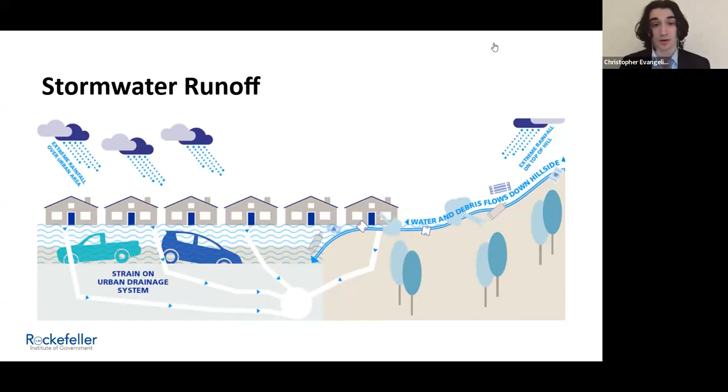To begin, let us fully understand how this flooding occurs. As everyone knows, clouds cause precipitation that leads to water being built up in the streets of our cities and suburban areas. This rain is built up in the pipes, and there is not enough drainage to properly assess and stop rain from compiling into massive floods, which was shown before. This is what we have now, traditional gray infrastructure, which is manufactured systems of drainage to stop stormwater and filtrate rainwater from piling up in the streets of cities and counties. This is our attempt to replace natural processes that remove rain and precipitation from our built environment, which is the areas that we live in, such as cities and suburban towns.

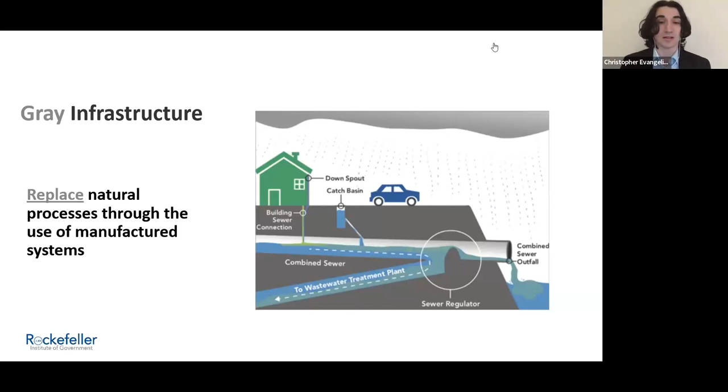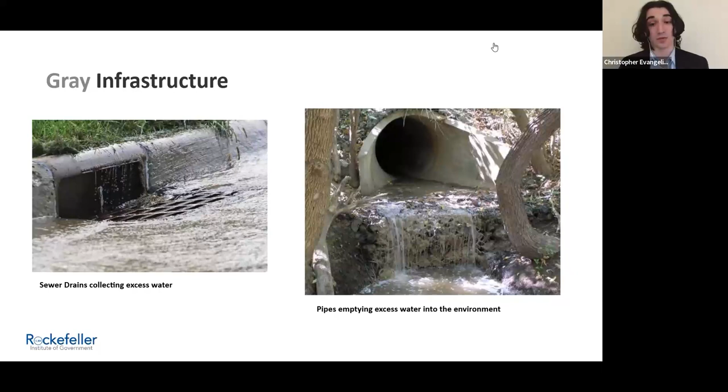These are just 2 examples of gray infrastructure showing sewer drains and piping. While these projects are doing the task of removing rainwater, they're also damaging the environment as shown by the right image, and also requiring immense construction times as well. All these systems combine to create the combined sewer overflow, or CSOs, which collect rainwater runoff, sewage, and wastewater into one pipe that is hastily removed. Which leads us to what we will be talking about today, green infrastructure. Green infrastructure is an approach to water management that protects, restores, and mimics natural processes in the water cycle. What this means in terms of stormwater mitigation is that water flows above ground, leading to extensive flooding and the spread of harmful pollutants into our waterways, such as rivers, lakes, and other bodies of water.

These waterways must be protected, and to do so, we need to improve on old infrastructure, gray infrastructure, by implementing these new measures to stop these areas from receiving regular flooding, also known as these flood zones.

This leads us to the implementation of green infrastructure itself, which is using nature in our cityscapes and urban environments in order to provide a filtration system for stormwater. This is the alternative to traditional gray infrastructure that we discussed before in terms of cost, aesthetic, and efficiency. This is the future of filtration, and this is what we need to implement in order to combat such harsh flooding. These are two projects that demonstrate the effectiveness and advantages of green infrastructure.

The left project is a permeable pavement, which uses a more porous concrete to allow water to seep to the bottom of the pavement, which decreases water buildup by about 70% as opposed to regular concrete, which is only about 10%.

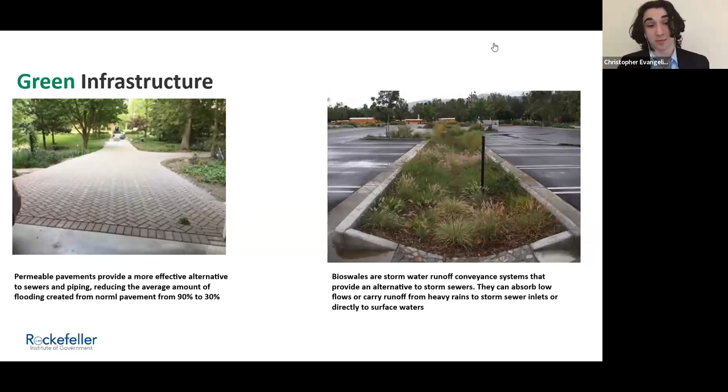With all that out of the way, my fellow cohort Amanda will now talk about the history of policy and federal involvement with green infrastructure in the United States.

Thank you, Chris. Hi, everyone. Thank you for joining us on this rainy day in New York. Maybe when you head outside afterwards, you'll notice some of the things that we're mentioning in this presentation.

And in the next few slides, we're going to review some of the history of the laws, as Chris mentioned, that have been implemented by the federal government to address stormwater runoff and water pollutants that can occur because of water overflow. The Federal Water Pollution Control Act of 1948 is the first law that focused and raised awareness of water pollution. The implementation of this law and its efforts are groundbreaking because it addressed the importance of protecting the waterways from hazardous contamination. It brought attention to the issues that were preventing some populations from accessing clean water.

The law directed states to implement water quality standards to ensure water safety. This means that each state was expected to monitor the water for pollutants. Standards must be set to meet specific requirements and criteria to ensure continuous water safety for consumption and usage. Unfortunately, the law was a lackluster success and was later amended to become part of the Clean Water Act in 1972. Next slide, please.

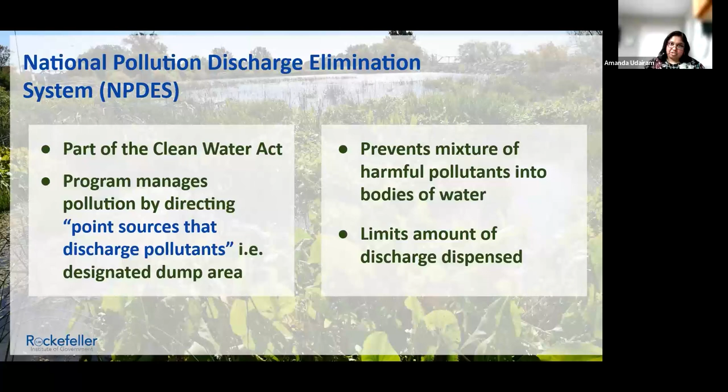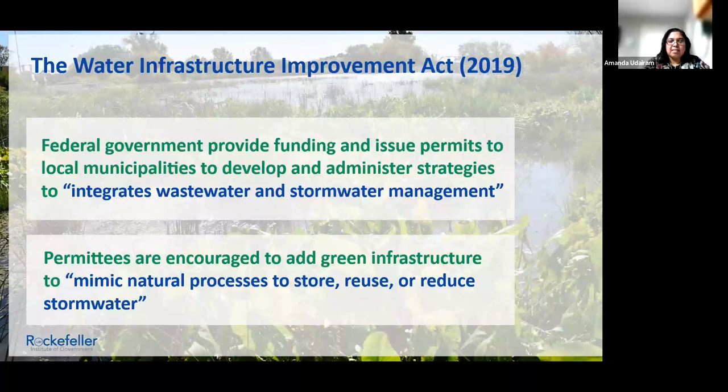More recently, the bipartisan infrastructure law was enacted, and it originated from the Infrastructure Investment and Jobs Act, which was passed in 2021. This law is monumental in that it provided the largest investment in water infrastructure. More than $50 billion were designated to the EPA infrastructure programs, which is to be distributed for improvements. Of this money, more than $12 billion were delegated for clean water infrastructure and $1.8 billion to protecting regional waters.

Additionally, $135 million were issued to improve the water. With this money, the EPA will oversee that the old water infrastructure be updated and maintained. Necessary safety improvements to waterways will also be made to encourage and promote recreational activities, such as swimming and fishing. Next slide, please.

In the next block, my cohorts will present their findings of 2 case studies. As mentioned, the first case study focuses on Toledo, Ohio, which borders the Maumee River, and the next case study centers around Albany, New York, and the Hudson River. An evaluation of best practices used in these cities to address and incorporate green infrastructure, reduce stormwater runoff, overflow, and flooding will be provided. Recommendations on how to move forward will also be discussed. Thank you. Here is Ashley, who will discuss the case study conducted in Toledo, Ohio.

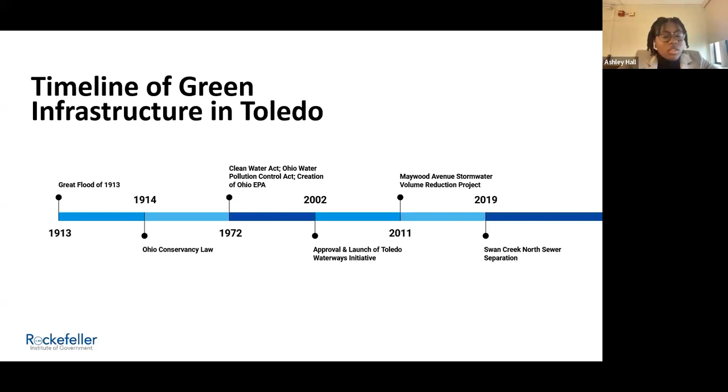In 1913, Ohio was hit with one of the greatest floods it has ever seen in its entire history. There were many days of heavy rainfall that caused a rise in water levels across the state. Following this major storm, the 1914 Ohio Conservancy Law was passed, which was the first law of its kind. It allowed the creation of regional agencies to provide flood protection for communities within the state. This was the start of Toledo's journey down the road of green infrastructure. Next, we see the Clean Water Act passed, as well as the creation of state EPAs, and following was the Toledo Waterways Initiative and two finished projects within Toledo. Next slide.

The Ohio Environmental Protection Agency's Division of Surface Water administers permits under the National Pollutant Discharge Elimination System, or NPDES. As for Toledo's major local policy, there is the Toledo Waterways Initiative. It is a $527 million program that will prevent 80% of the average overflow volume from getting into our waterways and is part of the city's long-term control plan to reduce combined sewer overflows. Next slide.

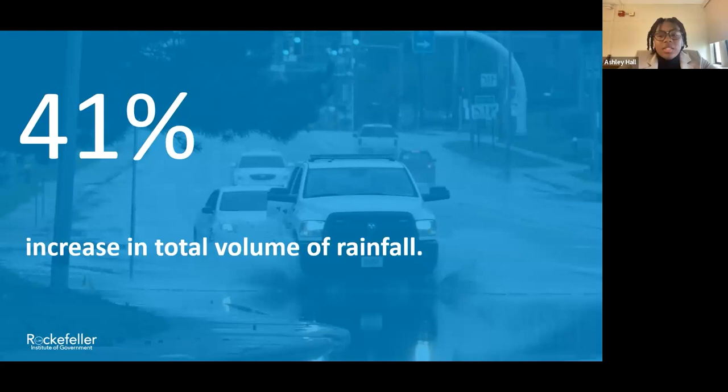An increase in Toledo's annual rainfall has caused systems like the Bayview wastewater treatment plant to reach capacity and consequently overflow. This overflow causes raw sewage to flow into Swan Creek, the Ottawa River, and the Maumee River. In 2021, it was reported to the Ohio EPA that as much as 150 million gallons of untreated wastewater were dumped in the Maumee. With the onslaught of changes in climate over the past 70 years, since the 1950s, the city has seen a 41% increase in the total volume of rainfall and a 19.4% increase in precipitation. With the threat of climate change, current flooding within the city will only continue to worsen. Next slide.

When asked about where she could see improvements in green infrastructure, Lauren Rush, a stormwater expert, said that the more you get people involved, the better it is for the community. Toledo has been very dedicated to engaging and educating the community in regards to green infrastructure and storm and wastewater mitigation. This has made it so that projects are easier because the community is involved and understands the importance of implementing green infrastructure. Next slide, please.

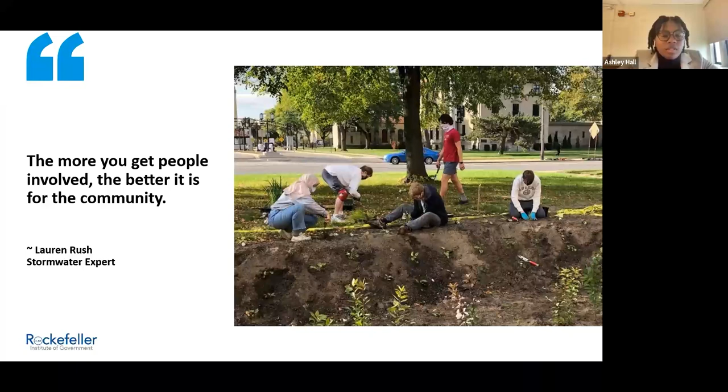The Maywood Avenue Stormwater Volume Reduction Project was a reconstruction of the neighborhood to accommodate bioswales, rain gardens, and a mix of other common green infrastructure practices. To reiterate what Chris said earlier, bioswales are an aesthetically pleasing alternative to storm sewers that use plants and soil mixtures to filter and treat stormwater.

The city chose this project because in Toledo, sewage and stormwater are carried in the same pipes, and the large quantities of stormwater tend to overwork the system, leading to flooding in resident basements. The implementation of bioswales and rain gardens is a great way to mitigate the flood risk in flood-prone areas. The result of this project was a 64% reduction in the average stormwater runoff on Maywood Avenue. Next slide, please.

The Swan Creek Sewer Separation Project was a large-scale project separating combined sewers within the Erie, Hamilton, Ewing, and Junction areas. The green infrastructure techniques used were biorecreation, bioretention, and bioswales as well. Bioretention areas are depressed areas that allow shallow ponding of stormwater runoff, and biorecreation is a bioretention field that can be used for recreation in drier conditions.

This project was a necessity for the city of Toledo to reduce combined sewage overflows that impacted Swan Creek and the Maumee River. This project is one of many employed by the Toledo Waterways Initiative. Because the project was completed in 2019, a proper assessment of the benefits of this project has not been made yet. However, it is projected that the completion of the TWI would reduce the volume of combined sewer overflows by 77%, and by 2020, eliminate an estimated 650 million gallons of untreated wastewater from waterways. Next slide, please.

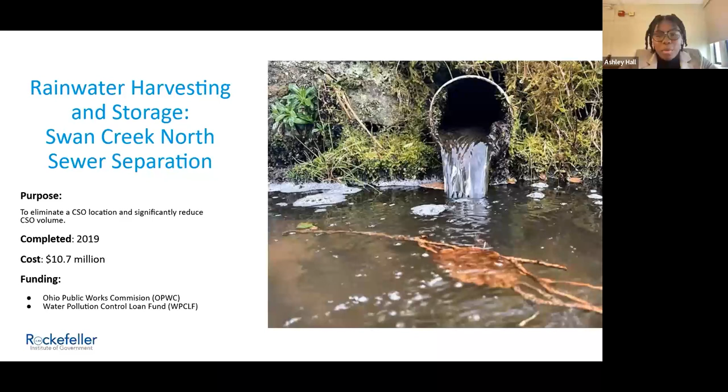Currently, the city of Toledo received $180.9 million in funding, and it's really interesting how they plan on using it. They are asking their citizens what they think should be done with the money, since they believe that a good portion of it could be used for replacing or repairing infrastructure. The money will be used as a part of the local Toledo Recovery Plan, which has a focus on youth, recreation, parks, green and healthy housing, job creation, economic development, and safe and livable neighborhoods.

Looking at this list, it seems as though there is space for green infrastructure projects or programs. However, because this is up to the citizens, it's a gripping moment since there's no clue as to how they think the money should be delegated. Next slide.

From Toledo, we can evaluate the impact of careful planning, proper identification of environmental issues, the essential component of engaging and educating the community, and the pros and cons of implementing smaller and larger projects on the environmental health of the city. From early on, Toledo was able to identify the issues they have and make a cost-benefit analysis of different green infrastructure programs they can use to solve their issues. Overall, it's safe to say the success of Toledo's projects is all due to these four factors. And now I will pass it on to our fellow cohort, Jessie, and she will be discussing Albany.

Thank you, Ashley. So we also picked the city of Albany to focus on as a smaller case study that can be compared to Toledo, Ohio. The city of Albany is of particular interest because it's not only the capital of New York State, but also has the Hudson River running through the capital region.

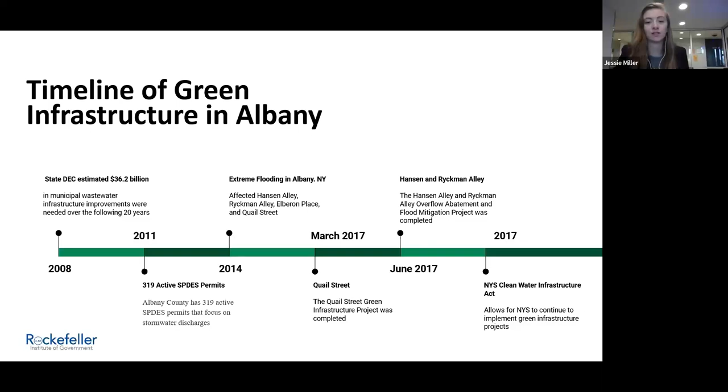And then we also have the enactment of the New York State Clean Water Infrastructure Act in 2017, which allows for New York State to continue to implement green infrastructure projects. Next slide, please.

So in 2008, the State Department of Environmental Conservation estimated that 36.2 billion in municipal wastewater infrastructure improvements were needed over the following 20 years, in part because New York State has some of the oldest water and wastewater systems in the United States. And as a result, many municipalities in the state must contend with aging infrastructure issues and the impacts of increased use and climate change. Next slide.

And the need for improvements in Albany especially became apparent when the city of Albany experienced an extreme flooding event in 2014. The streets and residential homes of Hansen Alley, Elberon Place, and Ryckman Alley were flooded by several feet of water and wastewater from combined sewer systems.

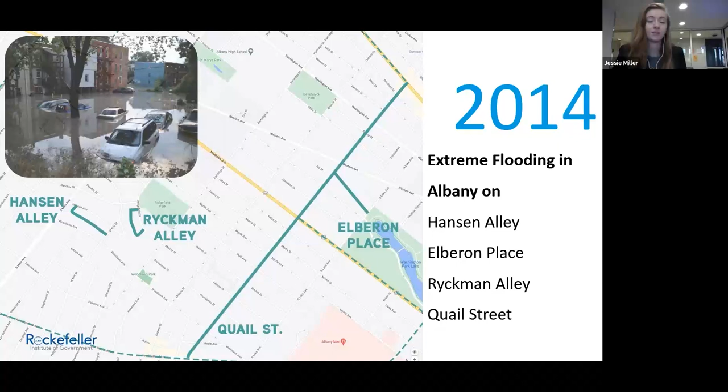The projects that have been put in place post-2014, including the Quail Street Green Infrastructure Project and the Hansen Alley and Ryckman Alley Overflow Abatement and Flood Mitigation Project, have acted within the scope of underlying New York State and federal policies, such as the State Pollutant Discharge Elimination System, also known as SPDES, and the Clean Water Act. Next slide.

The SPDES program has also been approved by the Environmental Protection Agency, specifically for the control of stormwater discharges in accordance with the Clean Water Act. The main difference between the two is that the SPDES program is broader in scope since it controls point source discharges to groundwaters as well as surface waters, in addition to providing funding as well. And the State Pollutant Discharge Elimination System program is designed to maintain New York's waters with reasonable standards of purity while eliminating pollution and maintaining the highest quality of water possible.

And the New York State Clean Water Infrastructure Act of 2017 invested $4 billion in water infrastructure projects and water quality protection across the state. As a part of this act, it offers $400 million in grants for clean and drinking water projects during the 2021-2022 state fiscal year to municipalities with projects that protect public health or improve water quality. Next slide, please.

In an interview with the New York regional contact from the EPA, Maureen Krudner, I had asked her if she could speak to what potential improvements could be made regarding policy and green infrastructure. And she said that from the policy end, looking at resiliency, New York State is actually trying to figure out how their regulations and these practices that are in their design manual, are they going to be good enough in 10 years? And she went on to explain that when it comes to green infrastructure, the mindset has become, how can we design this so it can be easily adapted in the future? Because the need that we have right now may not be the same need that we have 10 years from now. Next slide.

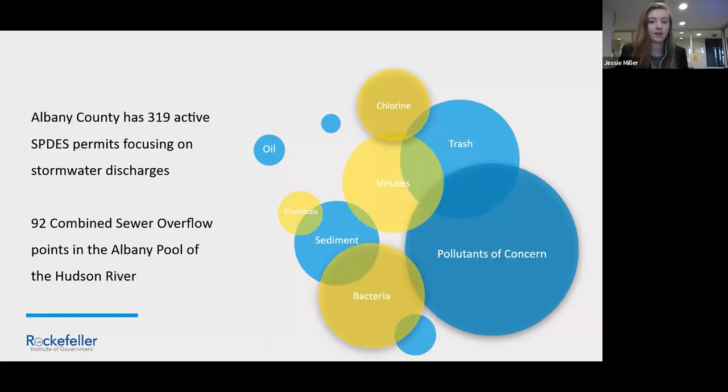So the first project that we looked at was the Quail Street Green Infrastructure Project. And for those of you that might not be familiar with the area, Quail Street is located in downtown Albany and typically houses many college students. The road also happens to be very narrow while simultaneously trying to accommodate for side street parking given the limited availability of off-street parking. The Quail Street Green Infrastructure Project runs along Quail Street from Madison Avenue to Central Avenue

and was implemented to reduce stormwater flows to the combined sewer system, which will decrease the frequency and intensity of combined sewer overflow occurrences. The project is able to do this by collecting the first 3 inches of rainfall in porous pavement and storm sewers and directing the runoff into bioretention basins until the flow in the combined sewer system returns to its normal level. And so the annual volume captured of this project is 8.867 million gallons, and the annual percent of combined sewer overflow reduction is 0.22% pool-wide.

And the funding for this project came from a Green Innovation Grant Program created by the New York State Environmental Facilities Corporation, which totaled 1.8 million, another 682,000 from the Albany Water Board, 293,000 from the city, and a $300,000 grant designated by the Office of State Assemblywoman Patricia Fahy. And this project acts in accordance with the state pollutant discharge elimination system permits.

And in an interview with Neil O'Connor, the engineer supervisor for the Albany Water Department, when talking about the impacts of the Quail Street Green Infrastructure Project, he had said that instead of extreme flooding happening once every 5 years, it's going to happen once every 50. And he went on to further say that we don't necessarily solve flooding.

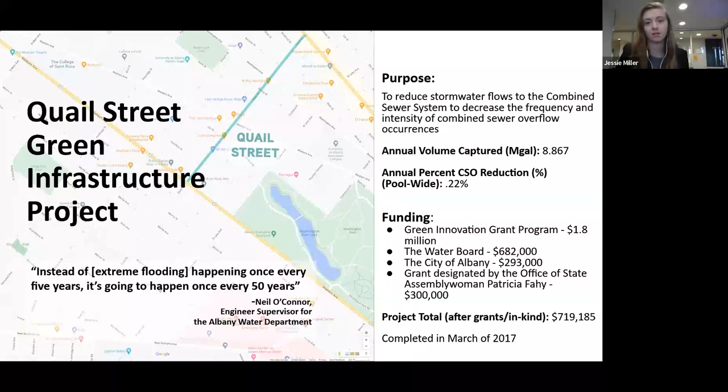And the next project that we looked at was the overflow and flood mitigation project of Hansen Alley and Ryckman Alley. Hansen Alley is a small alleyway that serves as an access drive for residents to reach their driveways. Hansen Alley is located in the residential area between Hanson Avenue and Woodlawn Avenue, which is a low-lying region where large amounts of stormwater runoff often collects.

So this project collects stormwater in new separate storm sewer pipes and is carried to an underground chamber system that is located beneath the Albany Central Babe Ruth baseball field. This allows for the reduction of flooding and runoff that would otherwise collect in combined sewers, leading to overflow. This project was completed in June of 2017 with future plans to design a pump station that uses collected rainwater for field irrigation.

And the City of Albany and the Albany Water Board produced results for 3 inches of rain in 1 hour. The total drainage area of this project was 13.7 acres, with 7.4 acres of this being impervious, which is equivalent to 54%. The maximum water surface for the design storm was 188 feet, and the maximum underground chamber volume was 776,500 gallons.

And in a performance analysis of the Hansen Alley project, it was found that after a total inflow of 120,000 cubic feet, there was 0 cubic feet of wet weather flow, meaning there was 100% reduction with 0 cubic feet of discharge in wet weather. Next slide, please.

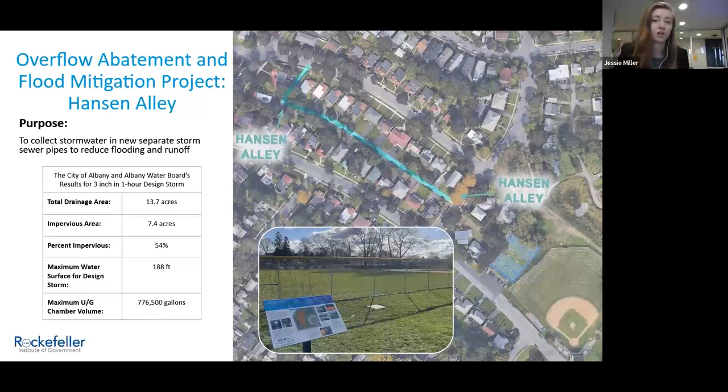The section of the project in Ryckman Alley was designed to have the same effects as that of Hansen Alley and serves as an access drive for the driveways of residents and is located in the residential area between Ridgefield Street and Ryckman Avenue, which is also a low-lying region. This project also separates the stormwater runoff into separate storm sewer pipes to reduce flooding and runoff in combined sewers, and was also completed in June of 2017.

And the City of Albany and the Albany Water Board also produced the results for 3 inches of rain in 1 hour for this project, with the total drainage area of 10.5 acres. 2.1 acres of this was impervious, which is equivalent to 20%. The maximum water surface for the design storm was 184.5 feet, and the maximum wetland volume was 640,300 gallons. In the performance analysis of the Ryckman Alley project, it was found that after experiencing 1.59 inches of precipitation, there was 0 cubic feet of wet weather flow and 0 cubic feet of discharge.

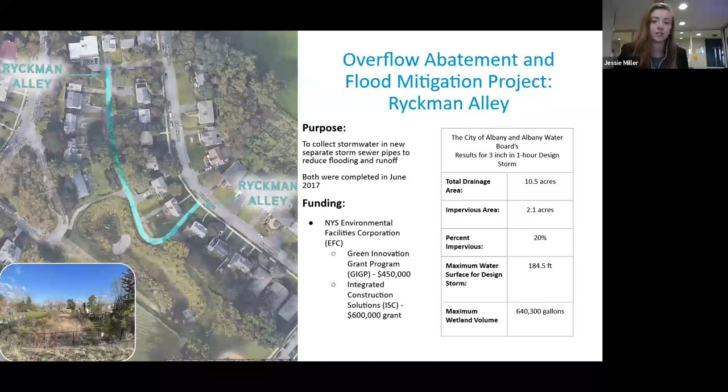And the project as a whole is partially funded by the New York State Environmental Facilities Corporation, which includes a $450,000 grant from the Green Innovation Grant Program and a $600,000 Integrated Construction Solutions Grant. Similar to the Quail Street Green Infrastructure Project, the Hansen Alley and Ryckman Alley Overflow Abatement and Flood Mitigation Project also acts in accordance with the SPDES permits. Next slide.

So while the projects implemented in the capital region of New York have worked towards Albany's goal to mitigate flooding and stormwater runoff, all to create a more sustainable future, the question arises if this will be enough given the effects climate change could have in the future. Because stormwater management is a necessary step in reducing pollution in our waterways, Albany should continue to seek out ways to improve their stormwater management systems in order to ensure the health of waterways such as the Hudson River.

Before the projects in Albany were implemented, the Hudson River Estuary Program had conducted a survey from December of 2011 to January of 2012 to analyze what barriers exist when it comes to implementing green infrastructure in the Hudson Valley. Of the 145 respondents, 23 were from Albany specifically, and the rest were from the surrounding area. The survey indicates that cost, lack of knowledge, and unfamiliarity and resistance from local governments were the largest barriers to green infrastructure. This survey and the lack of respondents to it indicates that more funding, outreach, and continuous education are needed in order to implement and explore the possibilities of green infrastructure practices.

The Water Department of the City of Albany has tried to combat these barriers by committing to continue implementing projects that increase the capacity of the combined sewer system to help reduce the frequency and intensity of flooding events. And when speaking to Joe Coffey, the Albany Water Commissioner, about the size of Albany's green infrastructure projects in comparison to Toledo's, he said, "Are we small or are we just trying to target the ultimate solution?"

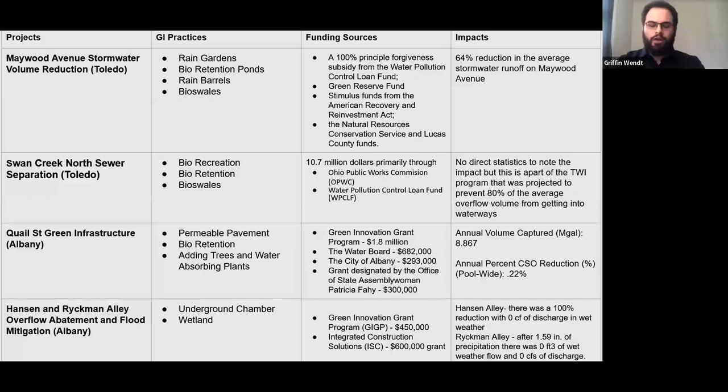In Albany, the Quail Street Green Infrastructure Project, as well as the Hansen and Ryckman Alley Project, each reduced stormwater runoff significantly, and they each took different methods to achieve this goal. As you can see with each project, they really do require various funding sources, and different green infrastructure practices were utilized. These are just some examples of the benefits of using green infrastructure to solve stormwater issues. Next slide, please.

So through our research, we found that there are three main recommendations and takeaways when looking to implement green infrastructure. The first is to incorporate green infrastructure practices into grade planning, which was really done with every project we looked at. A second is to combine higher education programs with community projects. And finally, we found there are several benefits to increasing public education as well as community engagement.

Next slide, please. So each project we have examined has utilized green infrastructure in the grade plan. Each project started from an issue such as poor drainage systems, flooding, something that just really needed to be solved. And while you could use conventional methods, a lot of green practices came into play. In Albany, the project on Rankin Alley and Hansen Alley did this. It involved an underground chamber to get better control of the pipes and to better control excess stormwater runoff.

At the same time, they created a visually appealing wetland that stored more of the runoff. This was visible to the residents and in the area, which added a lot of character. On Quail Street, a lot of green infrastructure was implemented, such as the pavement used, the trees and other things that were planted, as well as the bioretention systems that were used.

But they also had to use some conventional grey infrastructure, such as parts of the sidewalks and roads. In Toledo, the same was done, but in a much different way. In the Maywood Avenue project, they utilized rain gardens, bioswales, and many other green factors to reduce stormwater runoff. This was also implemented in addition to some grey practices.